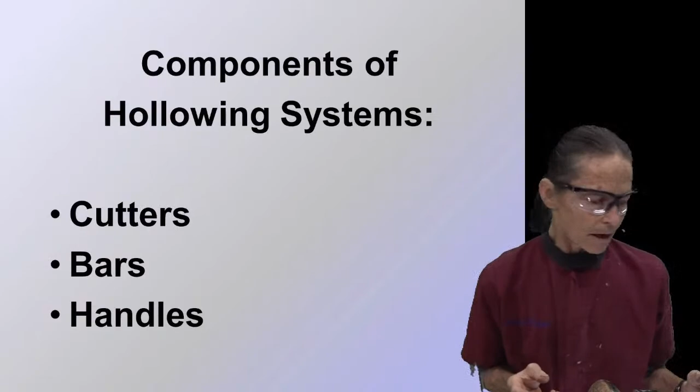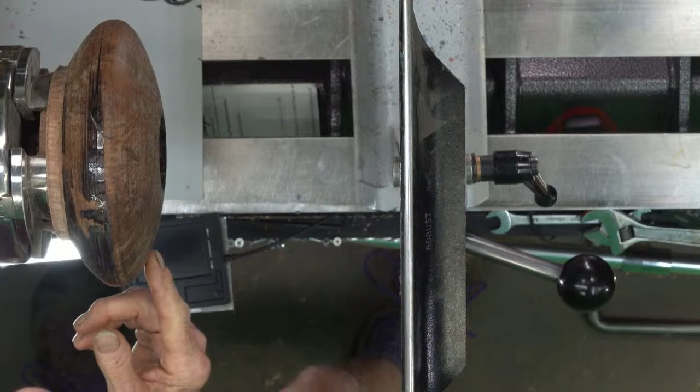All hollowing systems consist of three components: cutters, bars, and handles. And now, before I get too far along, what I'm talking about when I say hollowing is where I might be going to take a vessel like this one with a relatively small opening. I think the definition of hollow form is that the opening is 1/3 or less of the total diameter of the piece. So this is a hollow vessel. And in order to reach around the corner to hollow out a shape like this, a person's got to have tools that'll reach in there. You can't just do it with your bowl gouge or, well, certain shapes you can do with your spindle gouge, but typically we have hollowing systems that we use.

So to start with talking about the systems, here are some examples of cutters. The flat high-speed steel cutter, that's a teardrop cutter, which I get from the Woodturning Tool store, by the way. This is for finishing cuts. It's not really a material remover. The carbide cup cutter is a good material remover. Doesn't need sharpening. Lasts a really long time. They can either scrape or cut. They're kind of fiddly to set up if you expect not to just be scraping with them. And I'll show a little bit about how I would mount one of those.

The square high-speed steel cutters, these are 3/16, about 4 or 5 millimeters square. And this is pretty much the most typical hollowing system cutter that you'll find. And a lot of systems use these.

So bars. The bar is the thing that holds the cutter. And there are so many different ones. These are the ones I have, and you can see some are 3/4 in diameter, 19 millimeters. Some are half inch, 13 millimeters. Some are 3/8, 10 millimeter. And the reason I would choose one shape over the other is the size of the opening and the shape of the vessel. All those different shapes are designed to reach in around different shapes of vessel.

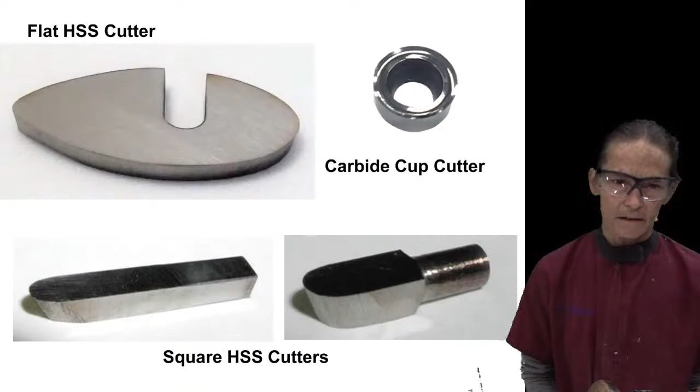In the bottom right, John Jordan's method is to take the high-speed steel square cutter, and if you look at the last slide here, you can see that one of them's rounded over on its end so that it'll fit into the hole in the end of the tool. And some of his have got a bigger hole, depends on what size bar it is. And that is also chosen because of what size opening and or shape of vessel I might be wanting to do.

Sharpening these 3/16 square cutters: some people will put them in little holders on the grinder. I just put them on a platform and do it holding it with my fingers. I've had really good luck with that, but lots of different ways to sharpen them as well. So if you're looking on somebody's website who sells hollowing stuff, then you'll see a lot of options. That was my point there.

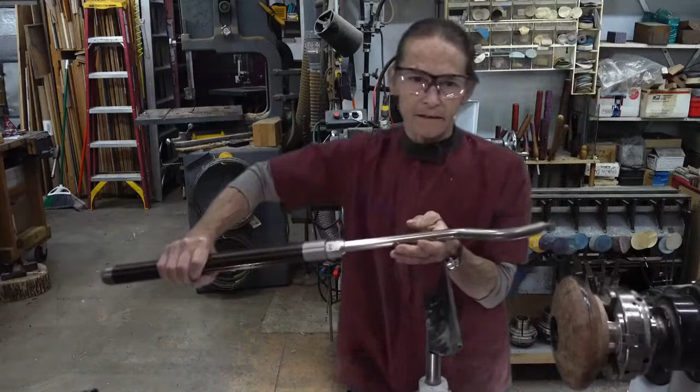Okay, so the bars go in some kind of a handle. This is the simplest, most straightforward hollowing system to start with. And it consists of a cutter on the end of a bar in a handle. And it's just a straight handle with set screws. And here we are with this kind of a thing. I've got my hollowing tool, cutter on the bar, and it's just in a straight handle, and I would use this with one hand on the tool rest and the other hand at the end of the handle. And this is actually the simplest and cheapest way to have a hollowing system.

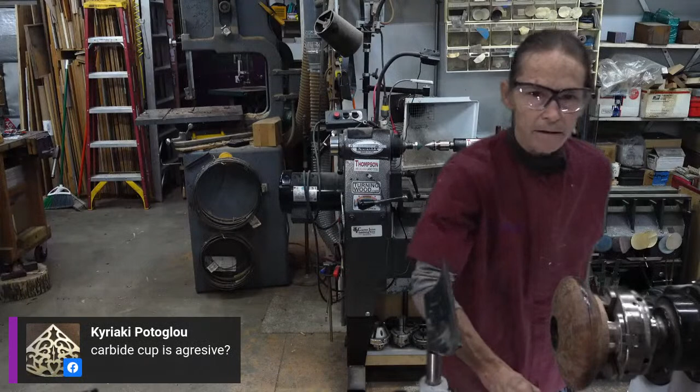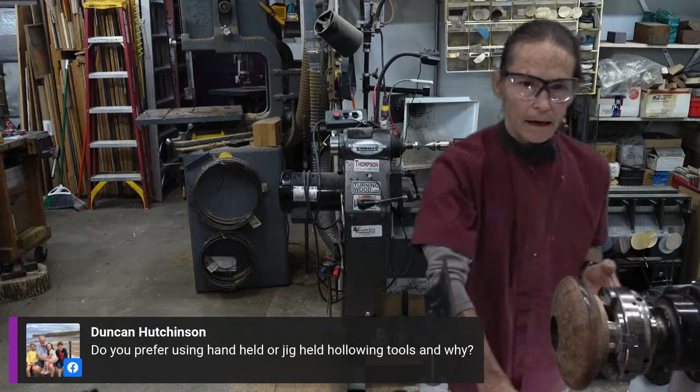So the carbide cup tends to be aggressive because it's got quite a sharp, aggressive cutting angle, but you can adjust its presentation to the wood to make it less aggressive. And a person can do hollowing like I just showed there, which I call handheld hollowing, as opposed to captured hollowing. Do I prefer handheld or, okay, jig held? That's another way to put it. I'm going to call it captured. But yeah, I will get to that. I'm glad you asked this question, Duncan, because I am going to go in depth into the why, because there's physics going on here, or mechanics, or whatever you want to call it. And I started with handheld hollowing, but as soon as I found a better way, I went there. So I'm going to get on with that.

Now, the next type of handle, kind of a step up, is the arm brace handle. This is John Jordan's modern version of the arm brace. Here is the arm brace handle that I learned with. It's the Dennis Stewart system. And you can see what's going on here is my elbow is in this, it's kind of a cradle that my arm goes in. And then the other thing is my wrist is upright so that I have a better wrist action for resisting the rolling of the tool.

And I've got 2 points of contact with this arm, put it on the tool rest, and I can also use this other arm. This is kind of an awkward position. I would actually be further away. And a lot of people like to use this sort of system with their headstock moved all the way to the end of the lathe so that they're standing right in front of it instead of leaning over like I am right now. So this is another form of basically handheld hollowing.

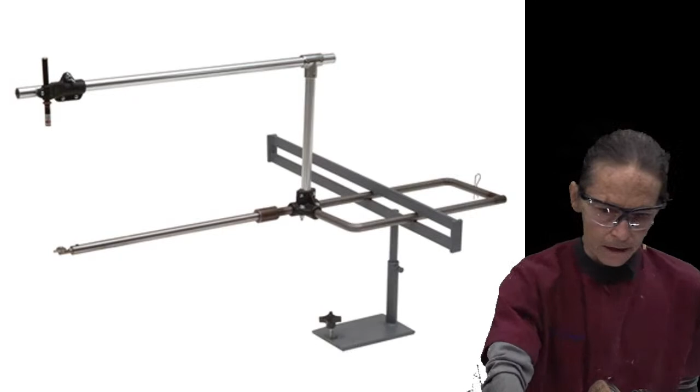Lyle's kind of in agreement with me here, and it's mainly because the Shopsmith was just really not built for that kind of force. I had one for a lot of years, 50 years maybe, almost. I just sold it a few years ago, and my opinion of the Shopsmith was it's a really good drill press. It's an excellent horizontal boring machine if you need one. It's a kind of okay miniature table saw. It's a great disc sander.

It's a terrible lathe. I would not recommend buying a Shopsmith to somebody who's looking for a lathe. But lots of people do turn on them and have some fun. And I would recommend it more for spindle turning than for what we call faceplate or chuck turning.

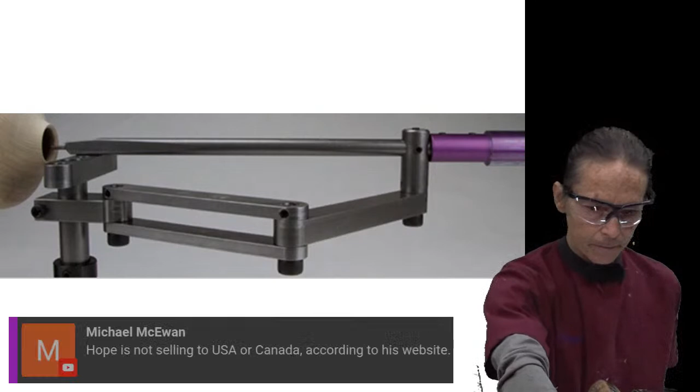Well, okay, Duncan, you're going to have to address that one. If Simon Hope doesn't ship to U.S. or Canada, okay, and maybe he ships to Italy. Hello, Pietro. Good to see you here.

Okay, articulating is a way to describe this kind of system. It's an articulating arm with several joints in it that allows you to move the handle to get around the shape of your vessel. This kind of handle will take your choice of bars and cutters. This is just a description of a handle. Now, everyone who sells handles always sells cutters and bars as well, but I don't like to be limited there. I will use anybody else's bars on anybody else's handles and anybody else's cutters just to get what I want to do.

Okay, so maybe you might have to call Hope if you want it in Canada. And here's Alan Z. Articulated arm rigs, yes. And we all are great minds. Alan is the guy who taught me how to use all this technology for the online demos and things. And so big thank you to Alan for getting me going, and many other people. He's taught most of the people who do this stuff.

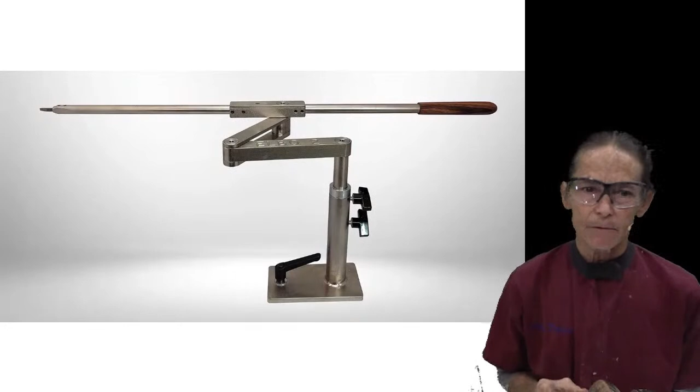So here we are with an articulating rig that has one holding point, right? Here we are with an articulating rig that has two holding points. You don't see the tool rest in this picture, but the business end of the bar where the cutter is would be resting on the tool rest. So this has got 2 points of support.

That backrest there, where the articulated arm is, anchors to the lathe bed. You could also put this articulating arm in an extra banjo if you liked that option better. That's what I would do because I do like that option better. But this is how it's sold.

And this is the elbow rig. Now, elbow's been around a long time. And when they first came out with their thing, they had their articulating arm in the tailstock Morse taper, which is genius in a way because you don't have to have a base for it.

But I guess it probably doesn't give you as much flexibility in the shapes you can turn, because it's just fixed in that one place where the tailstock is. So, okay, that's another way to do articulated arms.

And I'm going to go out on a limb here about mechanical design. Now, if I have this system and I have the tool resting on the tool rest, but then the rest of the arm is cantilevered off of that point and is not directly supported beneath its attachment point to the tool, whereas this one is, I'm going to say that this is likely to be stiffer and more stable, less likely to chatter, particularly if you get into a larger or deeper form.

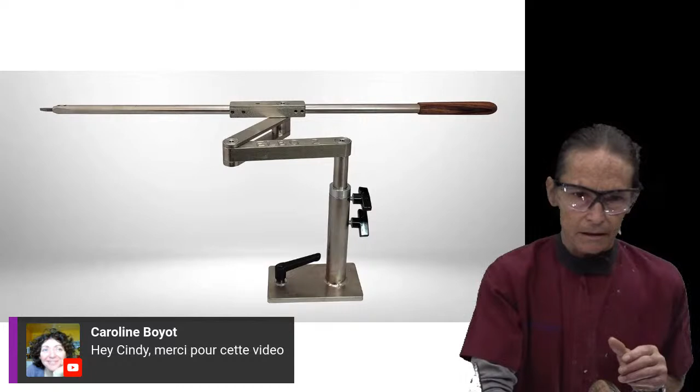Now we're going to move on and talk a little bit more about the forces in hollowing. So I'm first going to describe the main two forces on our tool when we're hollowing. I'm going to show this with the handheld rig here. We've got pitch, which is when the wood comes around, it's putting pressure down on the tool. As the wood's spinning around, it comes down onto the tool. And one of the motions we get, I'm calling it pitch. It tends to try to pitch your end of the tool up.

The arm brace handle gives you your whole forearm supporting, and it gives you better bracing for those pitching moments. A handheld tool like this one, I'm not going to hold it right up here. I'm going to hold it back further so I have more mechanical advantage. More on that in a moment. And then the other force we're contending with in hollowing is what I'm going to call roll. When the wood pushes down, it's going to try to roll the tool over. So you, with your handheld rig, are counteracting the roll with your hand. And that's where that arm brace came from, where you've got your wrist upright, and that allows you a little more mechanical ability to resist that rolling tendency.

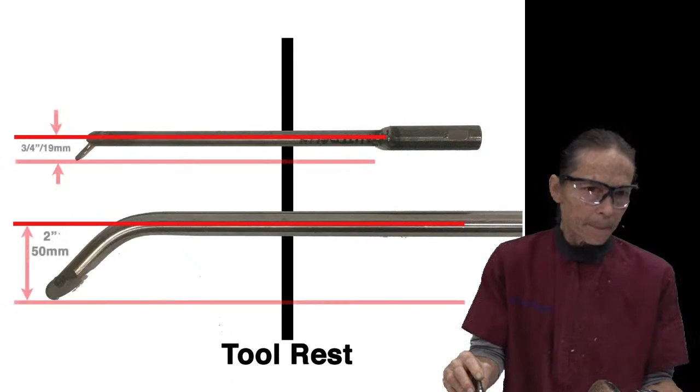And this is an example of, I actually own these two. This is an example of a type of turning tool that was designed to reach around the corner of the vessel. And what's going on here is, if you look at it on the tool rest, the center line of the bar that's on the tool rest, this is the point of contact. The center line of the bar there is quite a distance away from where the tool contacts the wood. More severe in the one that's 2 inches, 50 millimeters from the point of contact, than the one that's only 3/4 inch, 19 mil from there.

So counteracting this roll force is done by your handle. In a handheld hollowing rig, you're counteracting that force with your wrist, basically, or your wrist in an upright position.

And I've got somebody doing bad things to me.

Did we get rid of all of them? I think so. Yeah, sorry about that, folks. There are mean people in the world interfering with people like us for no reason. That's ridiculous.

Arm brace handles have been known to cause shoulder injuries. I have heard this, not in exactly so many words, but what I have heard is handheld hollowing, period, puts a ton of force into your body, because whether you're using an arm brace or a single handle, you are counteracting all of those forces. Basically, they're going into your shoulders and your elbow. So this is why I use a captured system. But I'm just talking about all the forces and things. So good point, David. Yes.

And you're going to have to translate this one for me. I do appreciate people coming from all over the world. This is great fun, isn't it? But sometimes I cannot understand. I understand a teeny bit of French or Spanish, but whatever language that was, nope.

Hollowing is the most difficult in wood turning? No, actually, hollowing is very easy, and it really doesn't take a lot of skill or talent if you buy a system that makes it easy for you. There are always ways to make things more difficult. But what I'm leading up to here is that we have the technology to make it very easy.

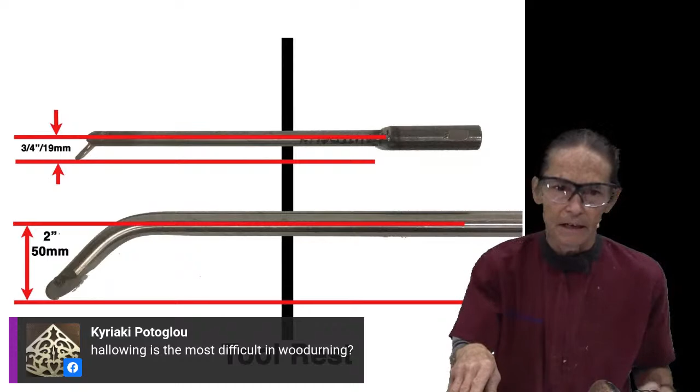And to me, hollowing is, maybe you'd call it a skill, but it's not a talent. All the talent goes into making the shape of the vessel or ornament or whatever you're making, or the embellishment. But hollowing is like, who even cares? The only reason it needs to be hollow is to keep it from cracking and let it dry a little faster than if it was a great big huge solid piece of wood. So I don't give much credence to developing skill doing hollowing the hardest way possible.

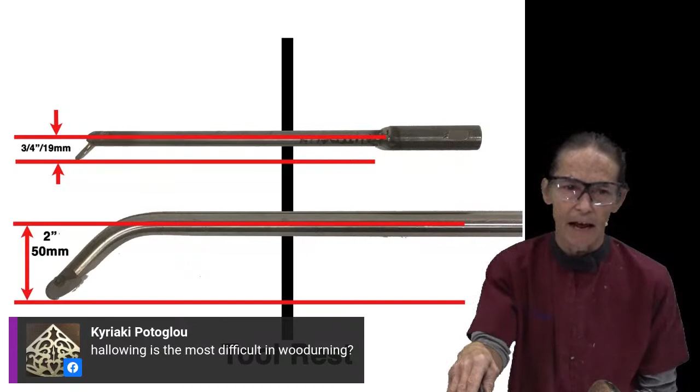And probably the hardest way possible would be to have a handheld rig with a straight handle using a tool like you see here at the bottom with the 2-inch overhang, or put more overhang in it, it'd be even worse. That would be the hardest way to hollow. And I don't really see that doing something in a way that makes it harder gives you anything better at all. May as well make it easy.

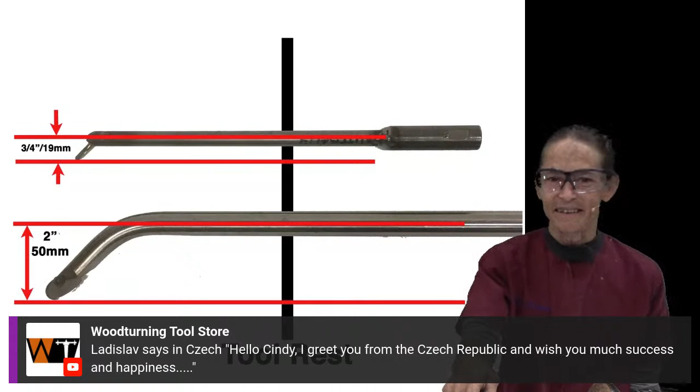Ladislav in Czech: I greet you from the Czech Republic and wish you much success and happiness. And thank you, Ladislav. I wish you also much success and happiness in your life and your turning. Thanks, Todd, for that little Google Translate there. Or maybe it was a Facebook Translate.

So this is a dilemma here. Roll is needing to be counteracted by something. And here are some things we do. Now, David Ellsworth is famous for developing a set of hollowing tools that look pretty much like this. He doesn't have any accounting for roll at all, except for this. If you ever look at David's hollowing tools, the handles are huge in diameter. And that grip with your hand at a greater diameter than the overhang is giving me mechanical advantage to overcome that rolling moment. So that's one thing to be done.

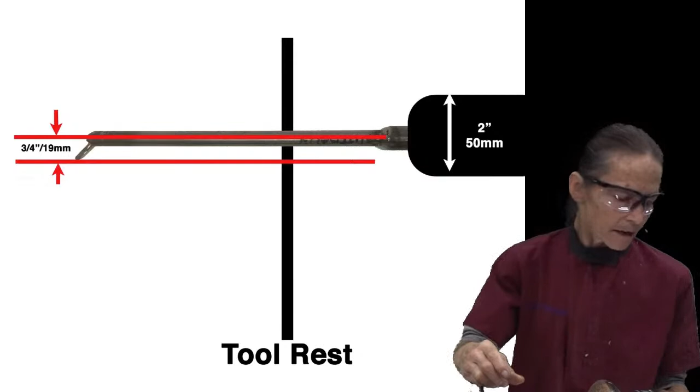Because you can see he's got an inch from the center line on his hand, and it's 3/4 of an inch from the cutter to the center line. So he's got a teeny bit of mechanical advantage over it.

And here's another idea. This is something invented for handheld hollowing. It's an outrigger, I'm calling this. And the way it works is both the outrigger and the tool sit on the tool rest. And that arrangement then goes in a handle. You could put this in your captured hollowing system, but you wouldn't need to. You could use this with an arm brace. Most people use it with a straight handle. And so it's a little bit of a step up in control from just having a straight handle.

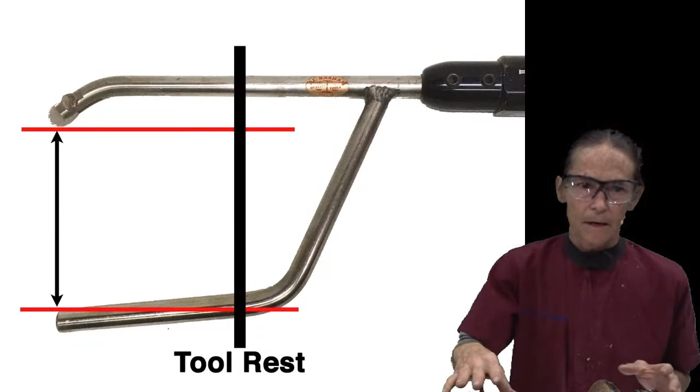And you can see that this tool is cantilevered out from the support point, just like the ones in the last slides, right? It's the same design as this. But what it's got going for it is that outrigger gives me a lot of mechanical advantage against the roll moments. The outrigger is further away from the support point than the tool is, so it therefore absorbs the roll motion of your turning. And roll is probably the hardest one to control in handheld hollowing.

So here's another solution to that roll problem, and this is what most commonly is seen. And these are the bars I started using. What's going on here is the bend is formed so that I can get around the shape of the vessel, around the curve of the undercut opening of the vessel.

But it's bent in such a way that the center line of support is right on the same line as the cutter's line. And that gives me the ability to have the roll be neutral, because though the tool is trying to be rolled by the lathe, it's no worse than if I just had a straight tool with a cutter on the end of it.

So this is what Dennis Stewart, I think, invented back in probably the 80s or 90s or something, and it was revolutionary in its time. It is a little more complicated forging though, and today we have lots of people still making these: John Jordan, Trent Bosch, Mike Hunter, probably Simon Hope in the UK, and various others.

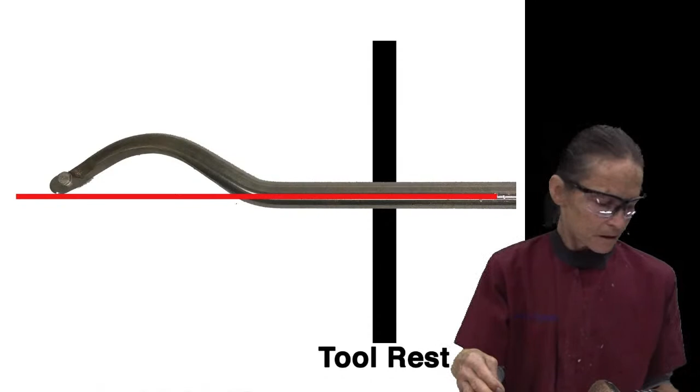So here's something to think about. If the support point is back here, then I'm cutting on the same line as the support. If I move the tool rest closer to the work, then I am supporting on the elbow of the bend, and I now have that same situation where my cutting point is cantilevered out past the support. So this design of tool needs to be used on the tool rest with the whole bend on the headstock side of the tool rest to get the advantage that it's giving you.

Now, of course, if you use a captured system, you can do whatever you want, because the captured system, I'm going to talk about why in a minute, takes care of all this for you, and you don't have to think about it. Although I usually do put the support point back after the bend.

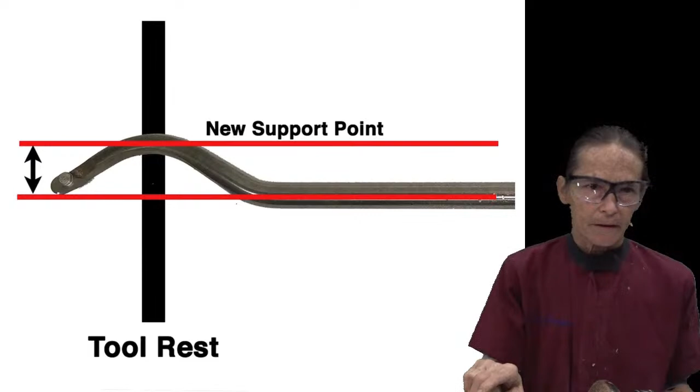So this kind of hollowing handle. Now, bars and cutters, of course, like I said, are interchangeable. We're just talking about what happens when you use a different kind of handle. And this kind of handle also has to counteract pitch. And here's what we need to think about.

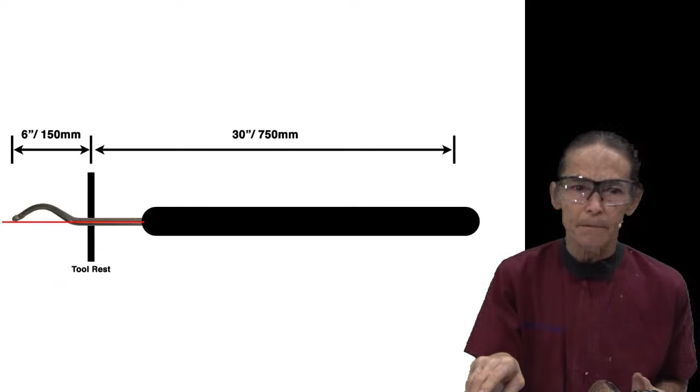In order to be successful in controlling the pitch that's caused by the wood coming down on top of the tool, we need to have at least 5 times as much length from the tool rest to the end of the handle as we have from the tool rest to the cutter tip. So look at this. If you're doing a 6-inch depth of hollow vessel, you need 30 inches, 750 millimeters of handle on the tool rest side.

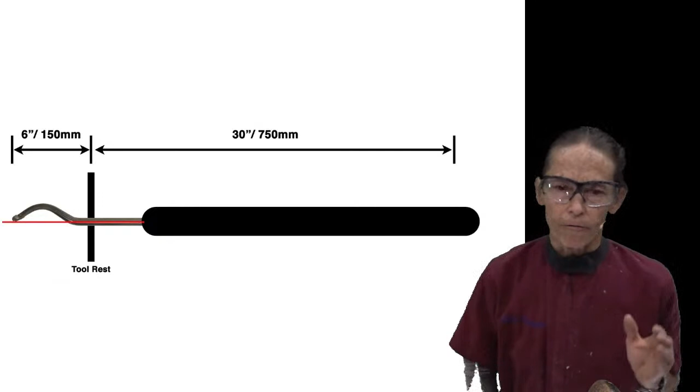That's why you'll see these people who have these monstrous boring bars with like 6 or 8 foot long handles. And that does accomplish what they're trying to do, which is to absorb the pitch forces very well. The more mechanical advantage you have over the amount of tool rest overhang, the easier your pitch control will be.

Go ahead and calculate and see what happens when you've got a 12-inch depth. That'd be 300 millimeters depth hanging over the tool rest, like a tall vessel. That's where you need a 5-foot handle.

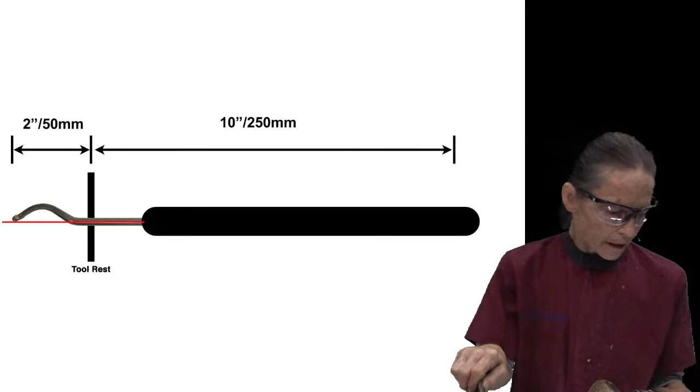The articulated, or let's say the captured systems, take care of pitch control really well because it's set. There's no way that the forces from the wood into the tool can move that arm. And this one, if there's any slop in that linkage, that'll pitch around a little bit.

But generally they're really tight and well made. This is a Trent Bosch one, and he makes really good stuff. The elbow, again, if there's any slop in those linkages, it's going to pitch around a little bit, but it's not going to be overcome by the pitch of the lathe. It's controlled, and these kind of systems, all of the captured systems, make hollowing super easy.

Here's how I like to think about it. When I was doing handheld hollowing, I was using 95% of my brain and muscle power just keeping the tool in control so that I could hollow out the shape I wanted. With the captured system, I'm using 5% of my brain and my muscle controlling the tool. I can even get up and walk away from it if I want to, because the captured system holds the tool right there. So that frees me up. Instead of 5% of my brain concentrating on the shape and the job I'm doing, 95% of my brain is concentrating on doing a good job.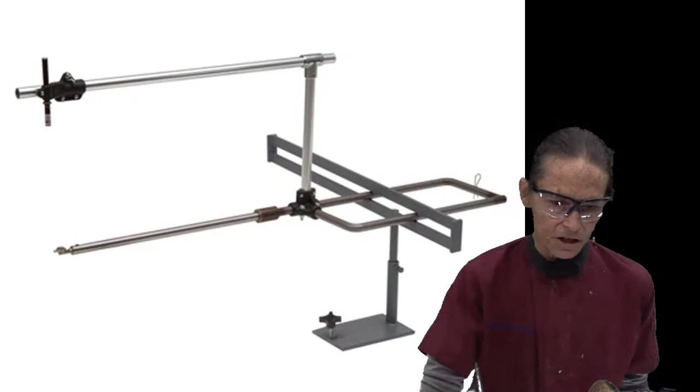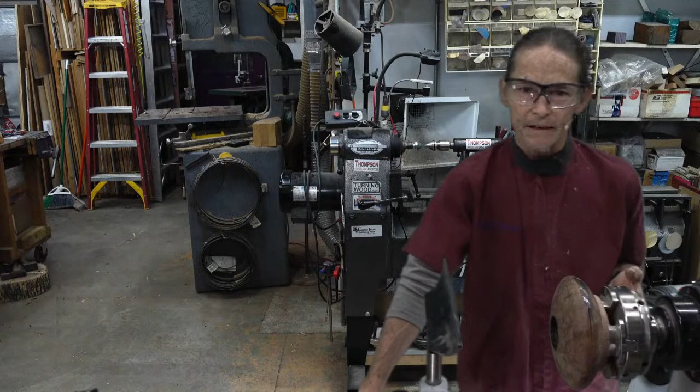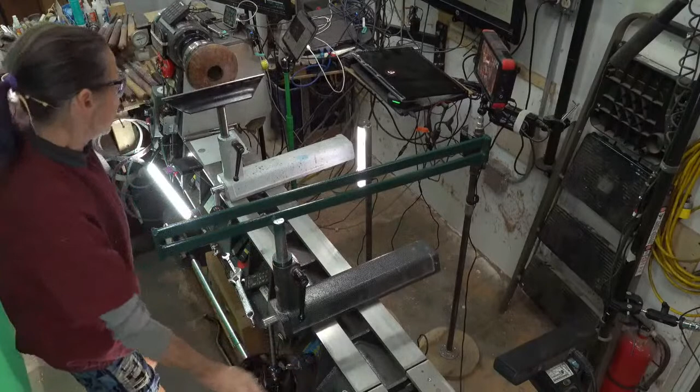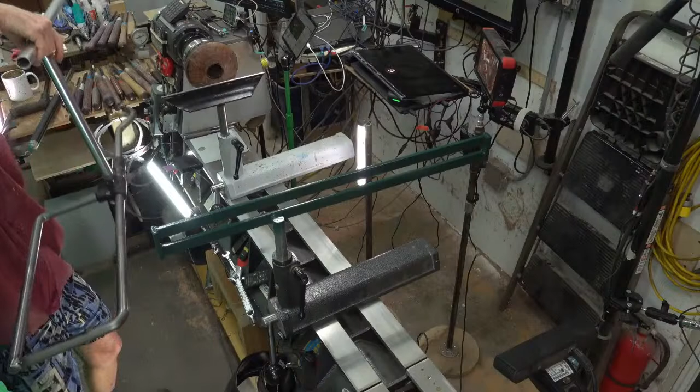But now what I'd like to do is put my actual hollowing rig up here and show you a little bit about how I'm going to set it up, the component parts, and what I'm going to do. So let's go for this view here. You can see my window there. I think I will give you a little bit better view here. So here's my window. I'm actually going to move it forward. Let me get my monitor out of the way. And bring up my hollowing apparatus. And I find this to be not too bad to carry around.

I lift it by its balance point, the post for the laser, and I just set it down somewhere in the shop. I keep this window on its second banjo on the tilt-away mechanism that my lathe has. So here's an important point. This pin is in a hole in the end of the D handle, and I need to put the pin in after I put the D handle through the window so that I can't accidentally pull this out while I'm hollowing. That would be not very good.

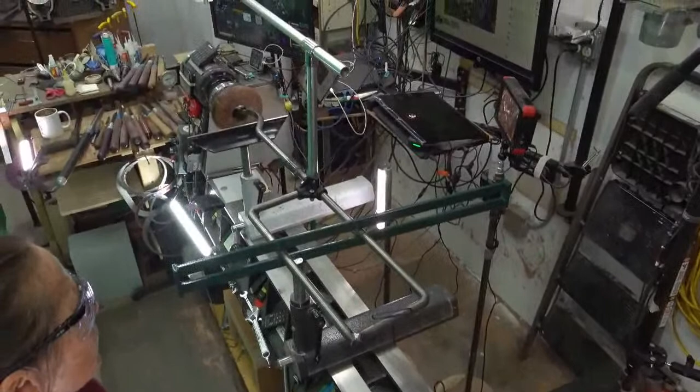So this is, oh, maybe I needed the camera back where it was to begin with, didn't I? I shouldn't have moved it. Spoke too soon. So now you can see the whole system there.

And question, do I use a laser or a camera arm with my captive rig, and which do I prefer? Yes, I was going to get to that momentarily, but I'll just answer your question. I prefer the camera for the most part, and I have both.

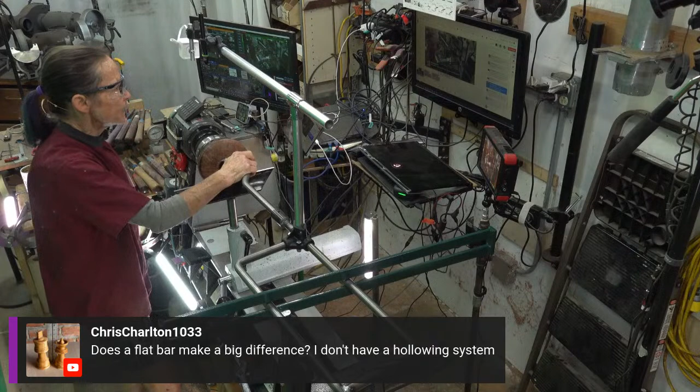Does a flat bar make a big difference? A flat bar, I'm thinking your question is, if instead of a round bar you had a flat bar, it would give you some mechanical advantage over the rolling moments by its width. And it's only going to help you if the width of the bar is greater than the distance between the far edge of the bar and the cutter. So it doesn't help much, but it helps about as much as putting a giant handle on the tool does. And you don't have a hollowing system.

It's kind of like saying, I want to make bowls, but I don't have a gouge. Yeah, you can use your scrapers to make a bowl. You can use various things to do hollowing versus buying a system if you don't want to. I'm talking about what's out there. And ultimately, we woodturners, if we want to do something the easiest, most forgiving, and highest performance way possible, might have to actually buy something. But we can also make our own stuff. We can buy used stuff. There are lots of ways to save money.

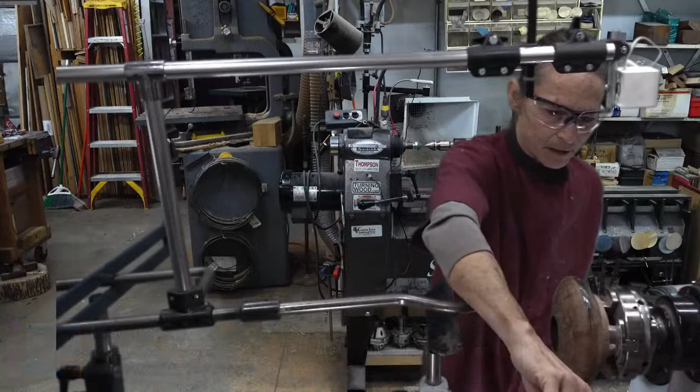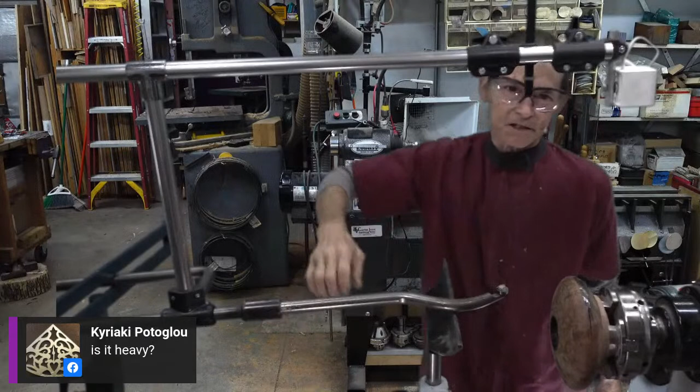And this is a very, very good question. Is it heavy? This system, well, you saw me, and I'm an old lady. I'm not really so strong. I can lift that up and carry it around. It's not particularly heavy. One of the reasons I don't use the Advanced Lathe Tools as much is because his stuff is really heavy, especially the big boring bar for larger vessels. I don't really want to carry a 40-pound piece of metal around.

So as the different things go, this particular design is doing it with mechanics, not with weight. The Advanced Lathe Tools that I said was heavy, that's the one that has a narrow spacing in the window. And it's overcoming the forces with weight instead of with physics. And this style of system, and there are tons of copies out there that use the same principles, tends to do it with mechanics rather than weight, although weight does make a difference. And I wouldn't have thought it, but maybe it's not weight, but bulk.

This is a 3/4 inch, 19 millimeter bar. If I put his 1.25 inch bar, that'd be like 33 millimeters or something. The straight bar makes a big difference. So deep in a tall vessel, I'll put the larger diameter bar on there for the bottom of the vessel. Whereas I might use this one because it has this bend in it, for the opening. This is not a good example, because for this kind of vessel I'm going to use this cutter for the whole thing. A deep vessel, I might need perhaps some compensation for the tool rest overhang with some added weight.

So Lyle, who makes this system, is saying the balance is important to tool control. Okay. Good point there.

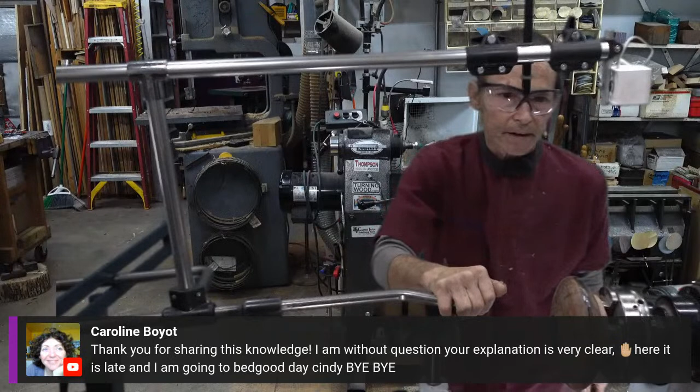And Caroline, thank you for being here. So you must be in Europe or someplace, and it is, in fact, late out there. I apologize. I wish I could come up with a session time that worked for everybody in the whole world. It doesn't work that way, though. So I do my best. This is something that works for me, too.

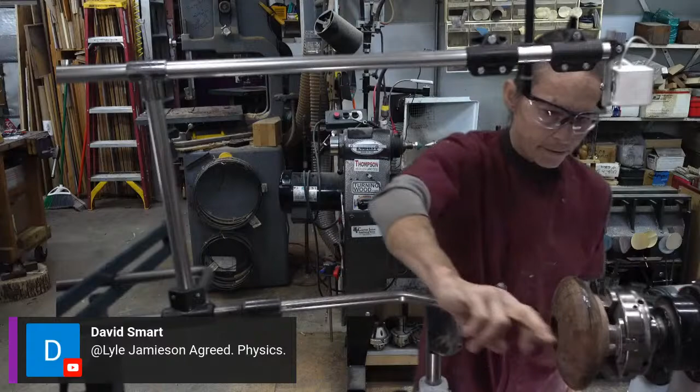Yep, physics. That's what we're talking about here. I didn't take physics in high school, but you know what? Had they offered wood turning in high school, I would have loved math, physics, metallurgy. They're missing out by trying to get kids to just memorize a bunch of stuff that means nothing to them, whereas practical application would make it all wonderful stuff. So I've come about this later in life.

All right, so I want to talk a little bit about the component parts and how I'm setting them up for a system like this one. And this is principles of setting up a captured system, articulated or window type. It has no relevance really to handheld hollowing. So let's get a better view. I think we're going to go with this view here for now. I don't really get a great look at this view, but this is something fairly good. So

here's one thing I'm thinking about. First of all, my tool needs to be on the tool rest. I have it on the tool rest back behind the bend. So I'm going to move my tool rest back enough to where I can get in the opening there. And then I want my backrest window to have enough sticking out of it here to give me the depth inside my vessel. And I might actually change that as I get deeper into a vessel.

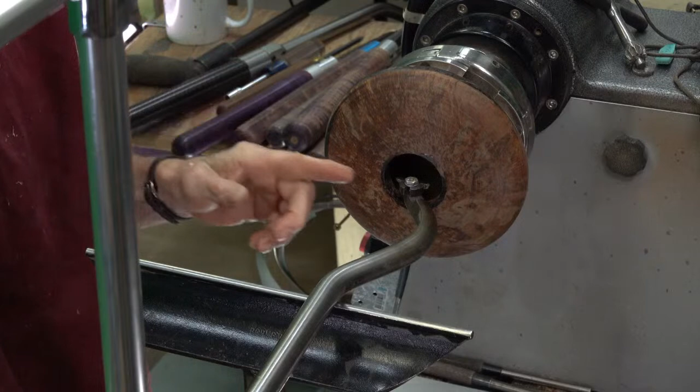And the other thing I want to do is, I don't know if you can see it, but I want the cutter to be relatively level with the back of the rig. And I want that when the cutter is on the center line. So let's first get the cutter on something that looks like the center line. That's going to give me, when I have the tool inside in the bottom of the vessel, when I'm doing the very bottom, a clean bottom to have the tool right on center line.

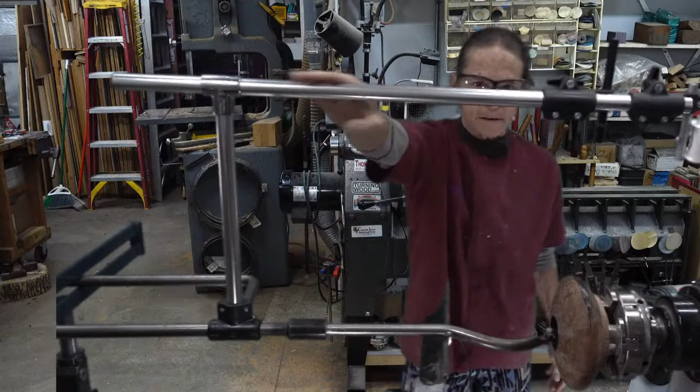So now I want to look at it and see if the backrest is giving me, and I could put a level on here. Don't look at this bar because it's distorted looking in the picture. What I like to do is have the cutter on center line and the backrest up just a bit from level, so that I know I never have the cutter higher than the backrest. That gives me the wrong presentation angle for the tool when it's cutting. Not that it wouldn't cut, not that it would be dangerous, it just is not going to perform its best. So I'm going to step back and take a look here, and this looks pretty good.

And then what I've got is this. I have to navigate a little bit here. Navigate down here. There's a collar on the shaft of the window that I set to the height that I want my window to be. So now whenever I put the window in, it's at the height that's right for this bar and handle and everything. When I put the larger diameter bar on, I'm going to have to raise this up a little because it raises it up with the larger diameter bar. I might just give myself a little more raise up here. It really never hurts to have the tool a little nose down.

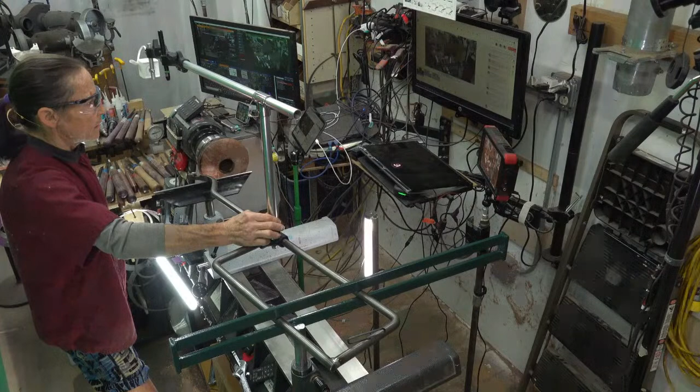Okay, so I'm moving the tool rest just so that I can show you something here. The other thing I'm going to do is look at this laser arrangement. What I have here is an apparatus mounted to the frame that consists of a post coming up, giving me spacing between the center of my vessel and the outer edge of my vessel. So I could actually do, it looks like about 30-inch diameter vessels with this system. This could be shorter. If it's shorter, it's going to be stiffer. But this is how the system comes.

There's a T here that set screws on, and I think we can get a kind of good look at it. The T has a couple of set screws that attach to the vertical arm and the horizontal arm. The horizontal arm now has both a laser and a camera on here. I really prefer to use the camera for finishing, but it's actually pretty fast to use the laser for roughing out.

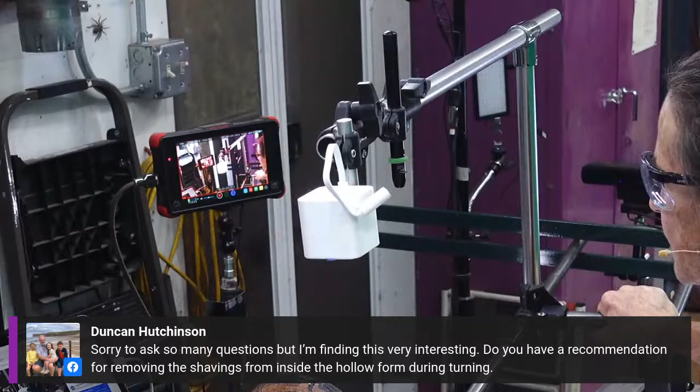Oh, and Duncan, never be sorry about asking questions. Please ask all of them. Do I have a recommendation for removing the shavings? Oh boy, do I ever. It's genius. David Nittman came up with it. It's called the spoon. I didn't bring it over here because I'm not actually doing any hollowing. I'll use it in my demo on Saturday, but I can run over and get it for you, and maybe give a little bit of an explanation of how I use it as well.

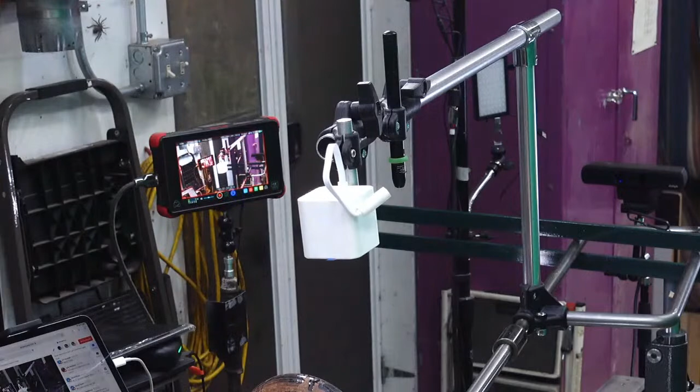Okay, the spoon. It's just a formed scooper, and a lot of people will use a device like this, and they'll just go scoop. They'll turn the lathe off, and they'll scoop, scoop, scoop. Boring. The way to use this is turn the lathe, leave the lathe running, and put the scoop in, and it deflects a stream of shavings out the opening. And it won't probably get all of them, not on a form like this, but that saves a lot of time.

The other way to get the chips out that I will often use is just compressed air blowing in the hole, and that gets rid of the chips, but it also puts dust in the air, so that's not the best way.

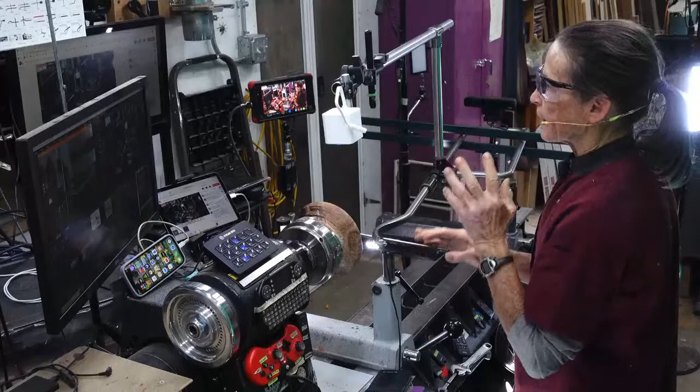Okay, so where was I? I'm talking about setting up this laser and camera. And I'm not going to use either one. Actually, the camera is not hooked up. It's just got its wire here. I'm going to work on that later. But I want to show you, we'll use the laser as an example here. So I have this horizontal bar that can be adjusted with these set screws in and out.

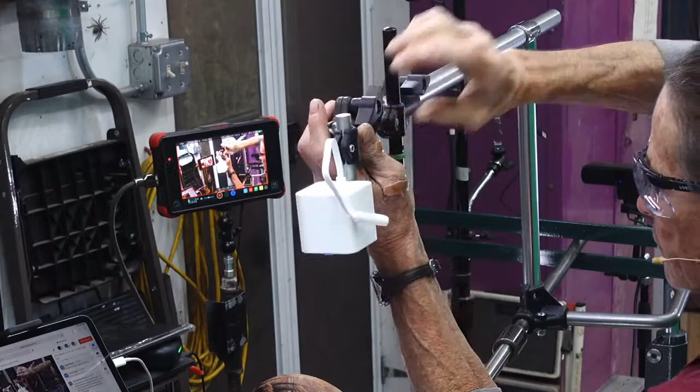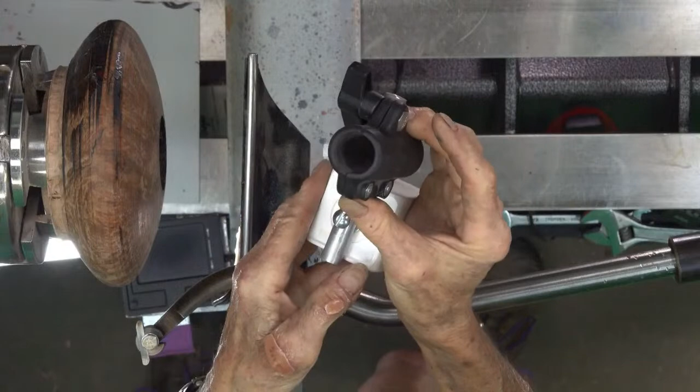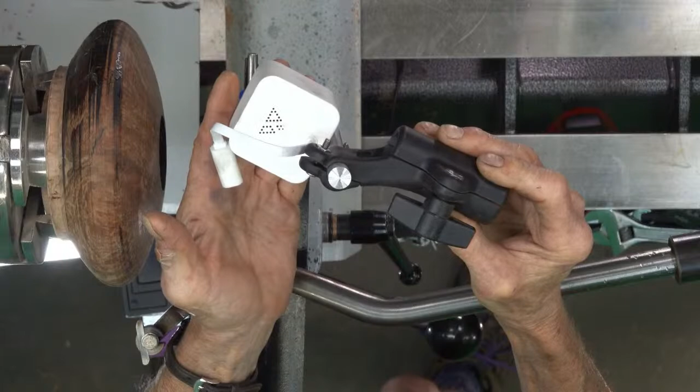First thing I'm going to do is rotate this bar. I guess I don't need to. No, I don't need to rotate the bar. I'll rotate this little, see if we can get a better picture of this. This little holder that holds the laser, and I'm using the same one to hold the camera here. Let's take this off. This has got the camera on it, but it goes on the bar, and tighten it up, and it tightens on the bar. It can rotate on the bar, but it can't swivel this way. And I'm going to set it up so I don't need to swivel it.

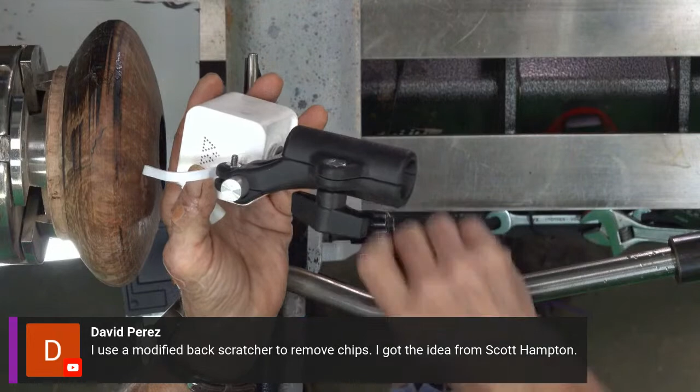A modified back scratcher, that's pretty funny. Yeah, very good, very good. Yep, same idea. David made that one, pounded it out of aluminum.

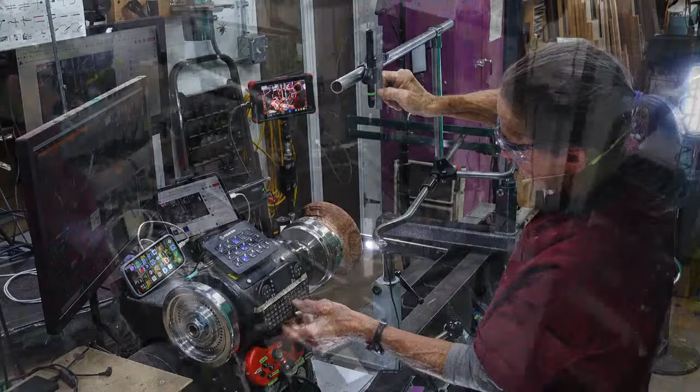So what I'm going to do to set the vertical or the horizontal bar is I'm going to take my laser thing and put it plumb, straight up and down vertical. See it over here, maybe over here. This one is distorted. It's not showing you reality here. This shows you that it's, let me look at it, pretty well straight up and down. And this is not rocket science here, just more or less get it there. And then I will

turn on the laser. First, let me show you turning on the laser. There's a little rubber ring. It's called a castration ring, I think. Don't ask me to explain that one. It gets rolled up so that it covers up the laser's push button switch so that the switch will stay on. These laser pointers are designed to have to hold the button down to keep the laser on.

Now, I see a little dot from the laser. I want that dot to be close to my cutter. So I have set my laser holder where I want it along the bar. I want it X amount of distance from the end of the bar. I don't want this bar to just stick out really long, because the more sticking out of the T, the more vibration I'm likely to have. So I would like to shorten this whole arrangement up as much as possible. So I've put the laser holder where I want it.

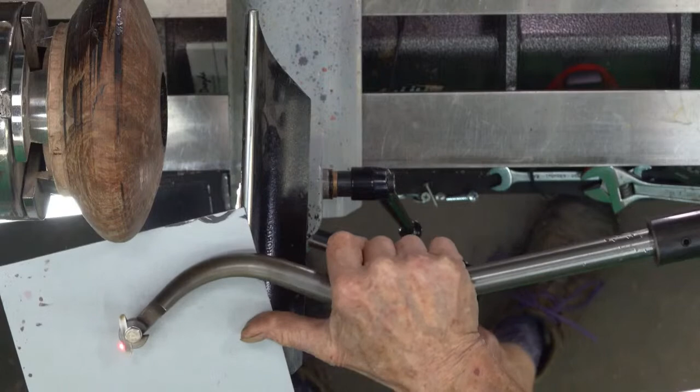Move us up here. I don't really need to. I have a bunch of slides showing how I set the laser as well. We're getting way over time, and I think I can show this with the slides actually faster than I can talk about it. So what I want to do is put the laser wall thickness away. I guess we'll use this here.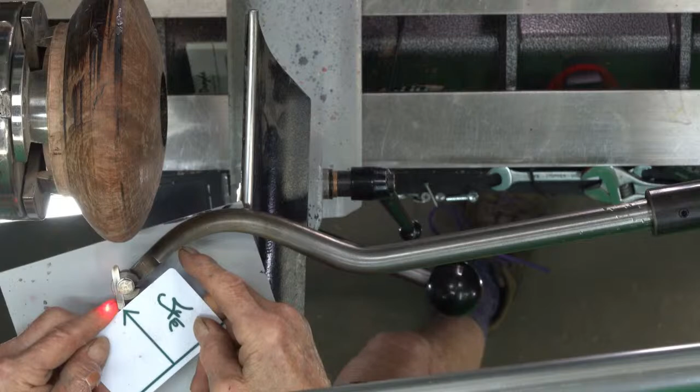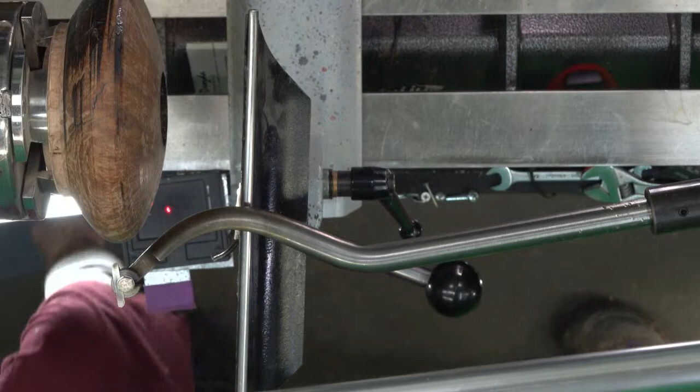I don't know how he does it. I don't actually do this. I use my ruler like that, but Lyle uses this little card here. A good example of what this card is showing me here is that, let's say I'm going to be hollowing this area of the vessel, and the tool, the hollowing rig, is going to be in about this attitude.

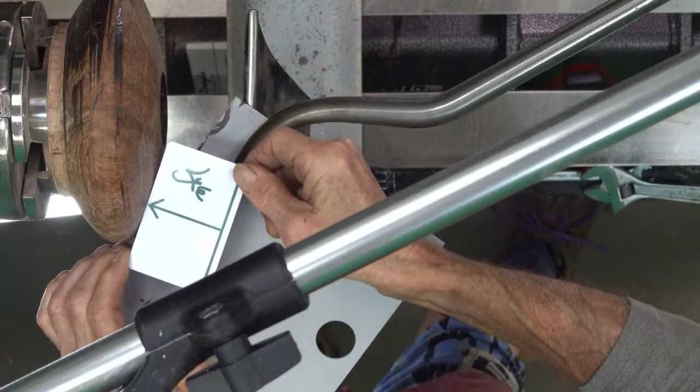And I've adjusted my swivel assembly, which is called that because it swivels. I can loosen this nut and swivel this cutter around wherever I want it. Now I want the cutter to be 90 degrees to the wall so that when I measure my wall thickness and I set my laser, I'm setting it so that the distance from the laser to the cutter

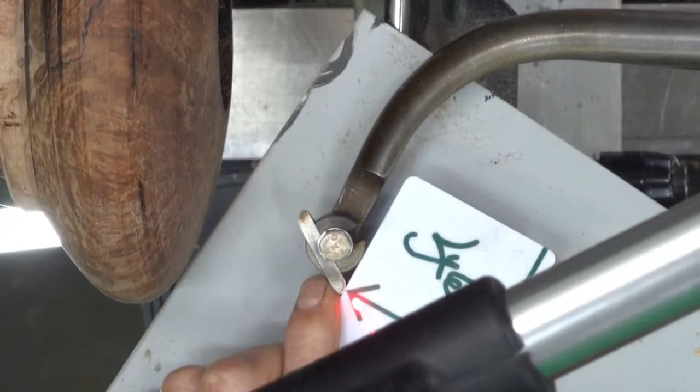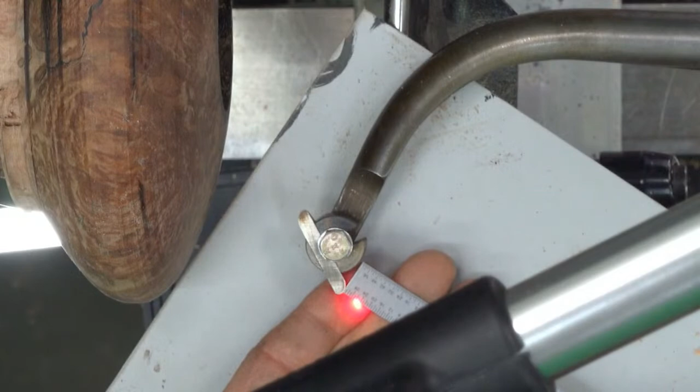equals my wall thickness. Let's see if you can see it better here. So you see that, there it is. So the distance between the laser dot and the cutter equals my intended wall thickness. If I want to know what my intended wall thickness is, which I always do, I'll use this ruler and it'll tell me, oh, 3/16. That sounds good. So now I will tighten up this laser holder.

And here's something to mention. The laser kind of wants to be directly above the cutter. And you'll hear people say, oh, it's got to be a perfect vertical right above the cutter, or you won't get an accurate wall thickness measurement. And that is fundamentally true. But in reality, here's what happens.

When you care about your measurement, it's when you are looking for a wall thickness this small. The amount that you will be inaccurate if your laser line is off a little bit, when your wall thickness is this thin, is so little, you don't need to worry about it. Yeah, okay, it's less accurate when you're roughing and your walls are really thick, and at that point, you don't really care that much.

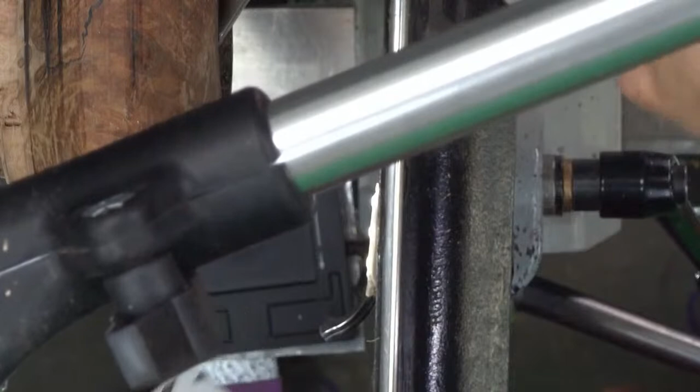So here's what I want to say about the laser. And this is why I actually prefer the camera, because the camera doesn't measure quite the same way. You actually have a picture of the cutter superimposed on your vessel while you're turning. Whereas the laser, as soon as I put the tool inside the vessel, which you can't see here, I am going to have to change my, you can see that there's a laser dot on there.

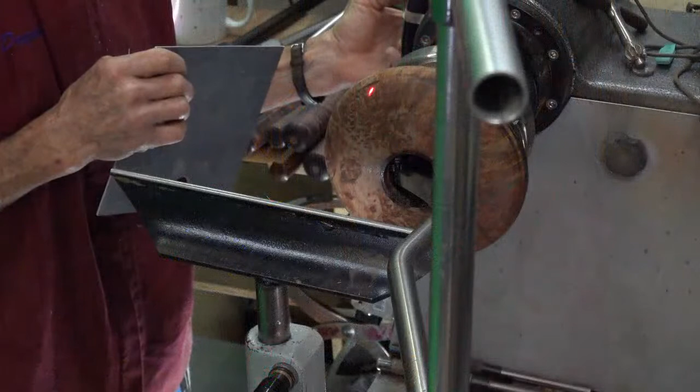Once I have the tool inside the piece, I can't see the tool anymore. Can't see it there. See it here. Okay, you can see it here. And so my laser dot right in this area of the vessel is showing me, once the laser dot, we call it, falls off the edge of the piece, once you can no longer see it, then you are at your wall thickness.

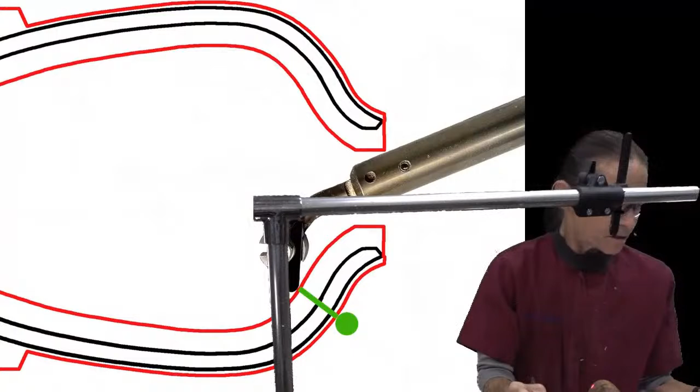Here's an explanation of what's going on here. Here's what I just did. I set my laser dot to be wall thickness away from the cutter so that where the cutter is contacting the wall, 90 degrees to the point of cut, there's the laser dot. It only gives me my accurate wall thickness if it's measuring 90 degrees to the wall at that point. So to do this upper part of the vessel, this works great.

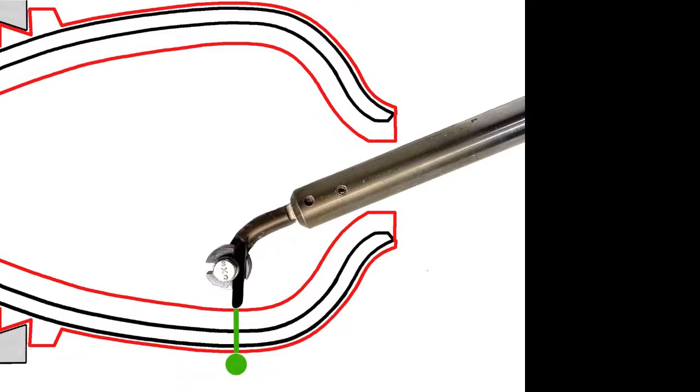Now when I do this, the more parallel to the lathe bed area, the largest diameter of the piece, I have reset. You see, I reset where my laser dot is. The laser dot is now 90 degrees to the wall at the point of contact. In this picture, the point of contact is in a different place. So now I'm going to get an accurate wall thickness right here on the vessel, but only right here.

If I try to measure the wall thickness at the large diameter with my laser set here, I don't get an accurate wall thickness measurement. I have to be measuring 90 degrees to the point of contact with the laser to get it to do an accurate measurement.

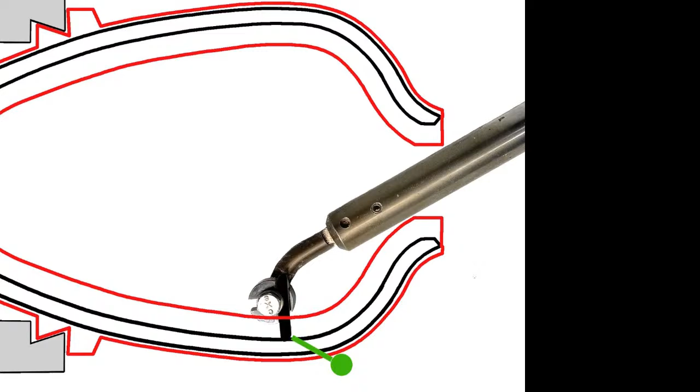So here's how I'd set a laser up for a shape like this. I've got this laser setting, which will do the area of the vessel in the green box. Then I'm going to reset the laser to do this part of the vessel. And then I'm going to reset the laser again to do this lower part. And then I'll reset it again. I don't know if I show that here. Yeah.

And what this is telling me is I need to reset the laser again because I can't even get to the bottom with the swivel assembly the way it is here. I wonder if I swiveled it again. I didn't. So I'm going to need to swivel that swivel assembly again and reset the laser so that the cutter is cutting right at the bottom of the vessel, whereas it can't reach the bottom of the vessel right now.

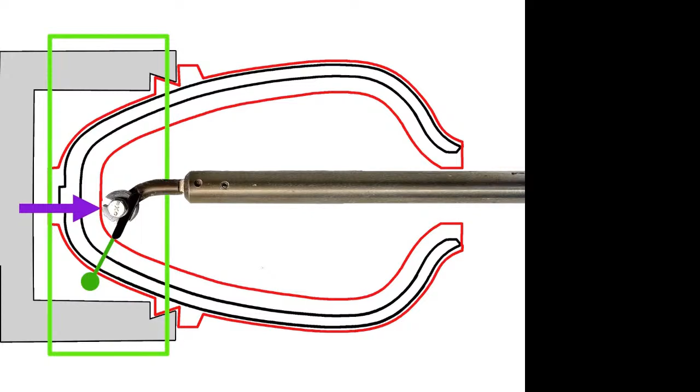So this apparatus being very much in the way, I'm going to take it off. And here's what I just did here. When I take this off, I pulled the pin out, and I'm going to drop the pin right through there. So that pin is always with me, and this is not too heavy. And I just find a place to put it down. Right now, I'm just putting it down in front of me. And don't forget to turn the laser off or you'll kill your batteries. And you can use rechargeable batteries in that.

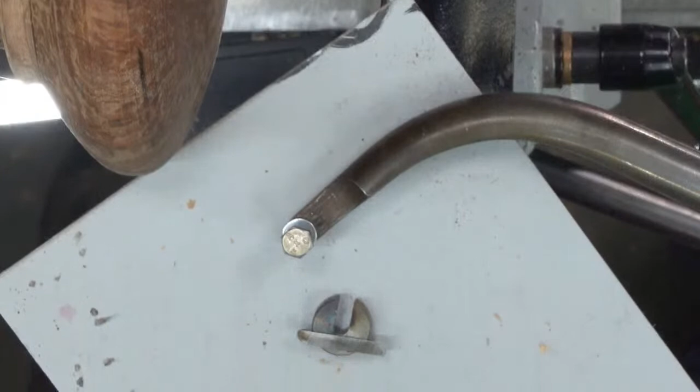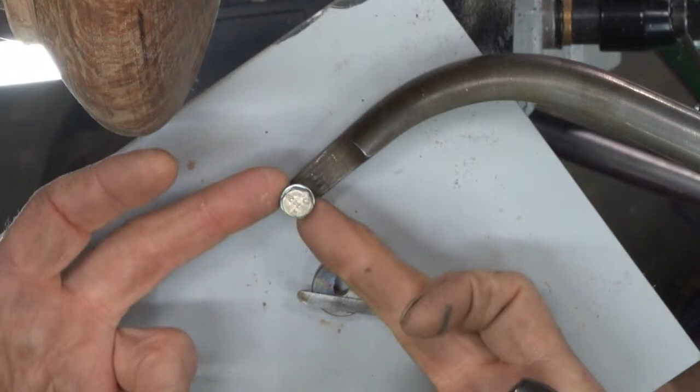Anyway, the teardrop goes on under the same screw that the swivel assembly goes under. If you're familiar with that teardrop, you would know that it has a slot just like the swivel assembly has. So I will just put it underneath this same bolt. Why am I using a bolt instead of an Allen screw?

The first time I got one of these was on the Dennis Stewart system, and it used an identical swivel assembly, and they came with a teardrop also. But they had an Allen screw to put the cutter on. Well, that Allen head fills up with chips like nobody's business, and it was a real nightmare to deal with. A nut driver and a hex head bolt, perfect.

So there we are. I'm going to just put my swivel back on there so I don't lose it. And we'll take this out so it doesn't cover my face.

And I will say good evening to you all, and thank you for being here. It's been fun. I hope you enjoyed this rundown of the mechanics and physics of hollowing systems. It's a subject that I think is important because we've got all these hollowing systems and we don't know where to start, which one to choose, why one might be better than another, or maybe why they are not any better. So thank you all for being here.